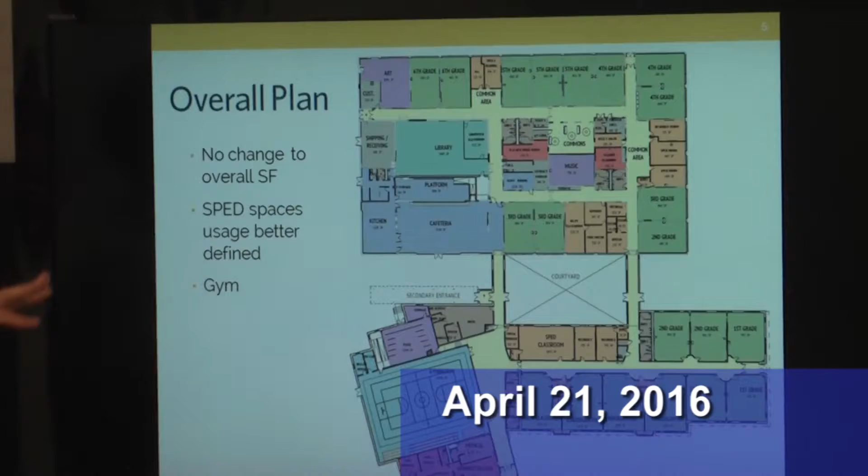On April 6th, we met with the design issues subcommittee that we appointed at the last meeting. That was very helpful. And just earlier today, we met with town department heads. So the overall plan, which you have colored copies of in front of you, the overall square footage has not changed. The major thing that's changed is the special education spaces — we went through those with the district and really started assigning people to each of those spaces.

Before we had just a general idea of, let's have a certain number of small rooms, a certain number of medium-sized rooms, and a certain number of larger rooms for the special education side of the curriculum. Now that we've really figured out — well, this is going to be a speech room, this is going to be a math Title I, this is going to be a reading Title I — we were able to change some of those layouts a little bit.

The gym changed quite a bit. We are sizing it better for a middle school size court, taking advantage of the sides of the gym for bleacher seating — both smaller bleacher seating for when it's used as a gym, and much larger bleacher seating when it's used as a performance space.

We've got ramp access from the gymnasium to the stage, so we have handicap access between those two spaces now, which is critical. We've also got a way to seal off the stage as best we can, so it can be used as an instrumental performance classroom. There's a door between the gymnasium and the ramp, and a folding door at the front of the stage. We also got the ramp between the cafeteria and the platform figured out a little better.

We're still juggling the server room and emergency electrical rooms and those kinds of things that our consultants need to place. We had the server room here in the renovation, but it turns out in terms of phasing it would be much better if that was in the new addition. So we're still playing with some of those spaces.

So we would put glass in the door and probably some glass along that wall so you can see into that space, with storage incorporated into it. We've been able to incorporate two of those in the new addition, which turned out to be really critical once we started figuring out all the rest of the special education spaces, because these became some of our only floating open spaces that anybody could use as a small group room. It worked out well in that new addition space.

So those two rooms are going to be used by other grades besides kindergarten and pre-K? Yeah, I'd say probably the majority of the time they will be used by kindergarten or pre-K, but there's flexibility that they can also be used by the 1st or 2nd grade classrooms that are in that same wing.

And potentially they could open both doors and both classrooms could start sharing some resources between them as well. So it provides that kind of flexibility.

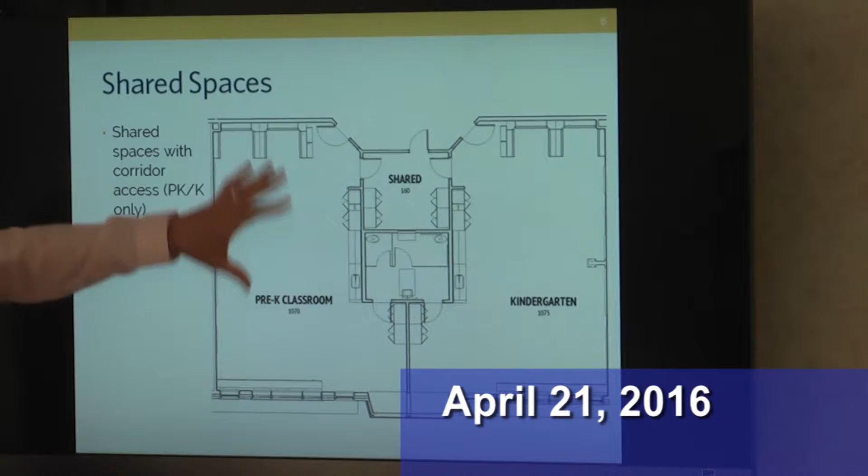We talked a lot about storage with the teachers, so you'll see we have some of these larger, tall wardrobe cabinets. We have more of those than we did before, for storage of larger materials, especially at the pre-K and kindergarten levels. We also talked a lot about the cubby area and how that's arranged and how it divides the classroom, whether it should be on this wall or that wall, and just the storage of the classroom in general.

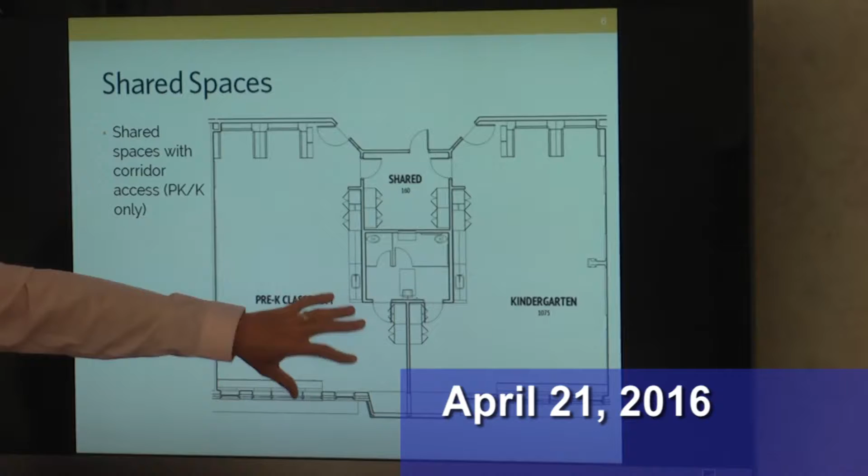Right now, the general idea is that this is the main teaching wall, so there'll be an interactive projector, and then we have some other spaces where you can have smaller breakout groups, moon-shaped tables as opposed to kidney bean-shaped tables.

Can you go back to that a minute? Of course. This lavatory you have down there, you have a door coming in from each classroom. You don't think that's a problem with privacy and use and function with little kids, opening the door with the wrong kid in the wrong spot?

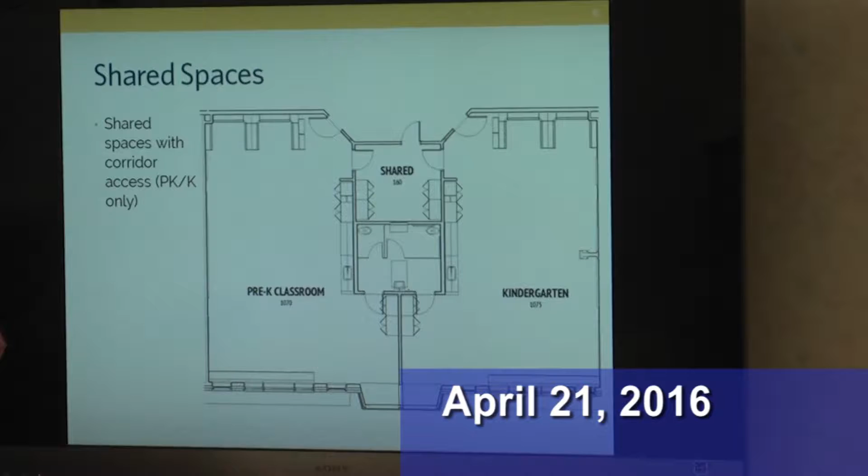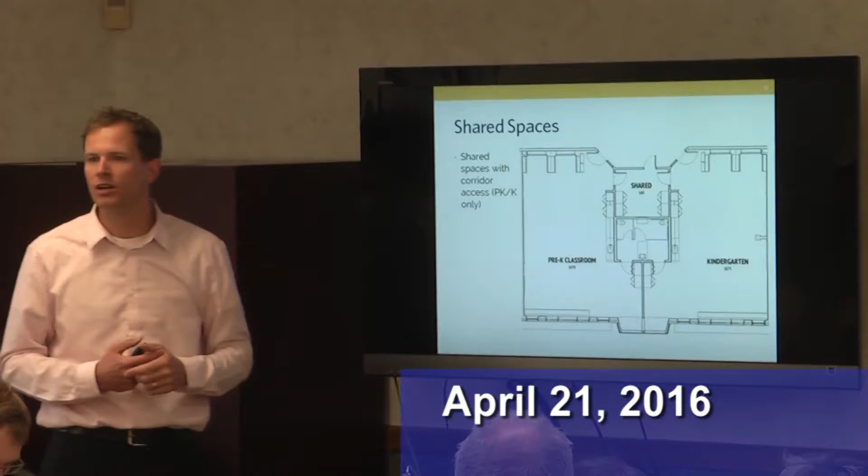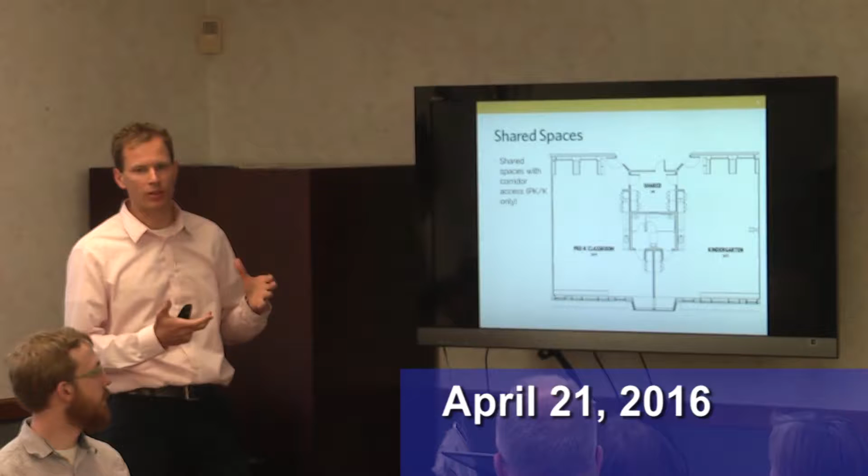So we have 2 different approaches, and that came directly from the teachers. Before, we had each classroom getting its own individual bathroom, and between the 2 kindergartens, that's what we're still showing - an individual handicapped accessible toilet for that individual classroom. At the pre-K level, they wanted the flexibility of having more toilets and just one sink, so they weren't worried about a student going in there and monopolizing that bathroom space by closing the door. Having 2 toilets in the room and one shared sink would be easier to cycle the kids through and to monitor them.

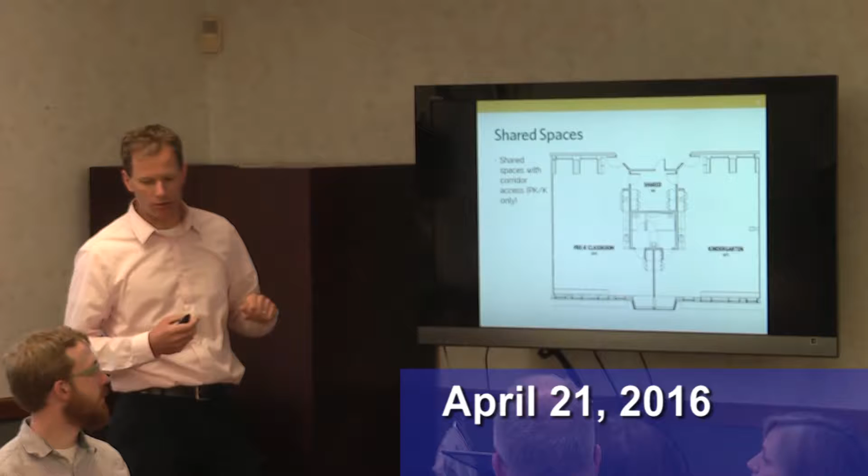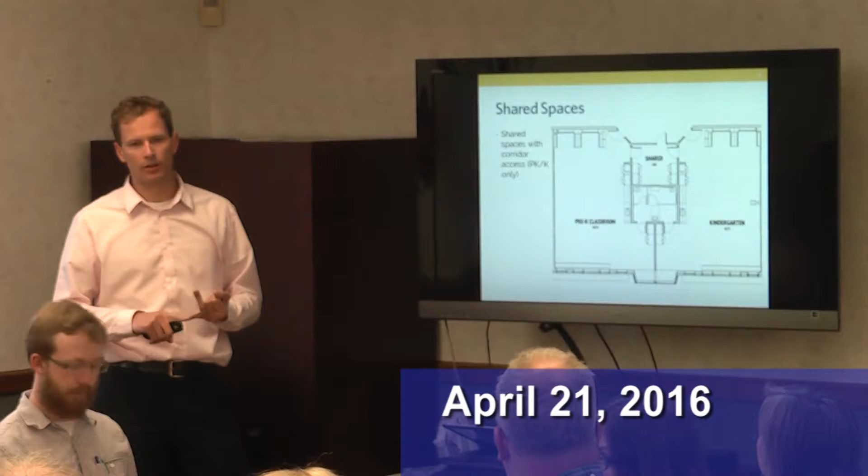So the thought was that this whole school is designed to be as flexible as possible. Right now this year, there's only 2 kindergarten classes. So given this floor plan, if we only had 2 kindergarten classes, they would take the 2 larger rooms towards the east end of that addition.

And the 2 pre-K classrooms would take the 2 rooms on the west end, so they would actually share this bathroom - this would be pre-K, and this would be pre-K. And then that room across the hall, that's a sped classroom, could be used as special education, or we have more flexibility there.

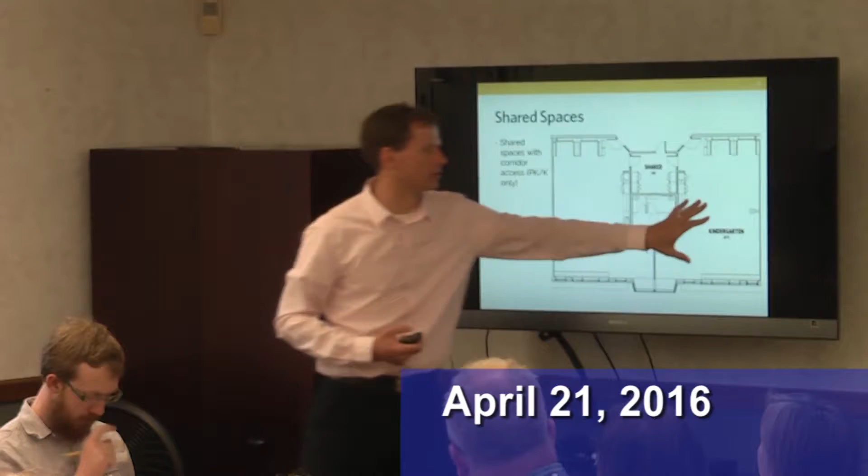If we have 3 kindergarten classrooms, then we're showing it more as we have it on the plans, with kindergarten, pre-K here, and then maybe another pre-K goes up in that sped classroom north of the hall. These are kind of generic names, but it was felt that having those 2 bathrooms and the amount of supervision that happens at the pre-K level, with the number of paras in the room, that kind of flexible arrangement worked better for them.

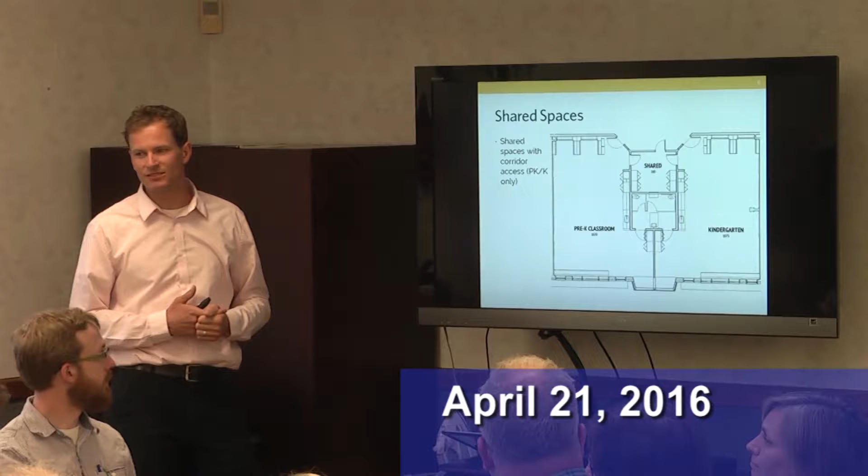You haven't convinced me, but I'm not a teacher - you have not convinced me. Yeah, I've had experience with that being very poor. But go ahead. Yeah, we've done both, and I don't know.

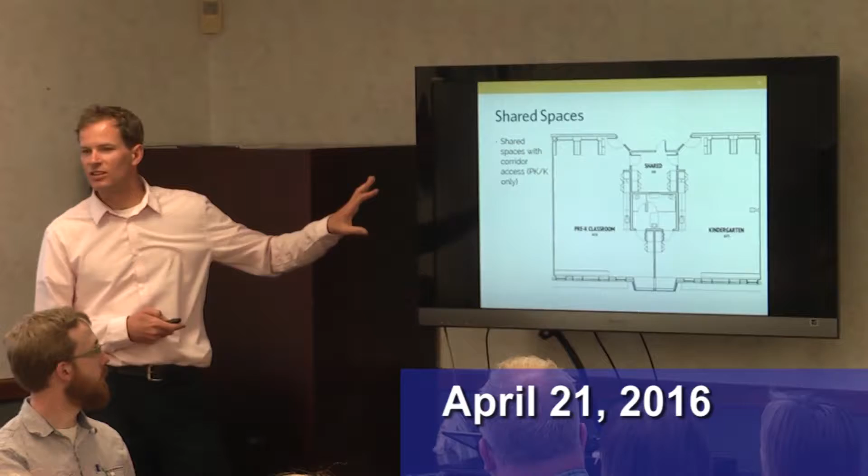Okay, any other questions on the pre-K kindergarten? Actually, I have other questions, but you want us to wait until you're done? No, that's fine. Thanks, anytime.

One question I received from some folks was related to the stage - is there space in the back for the actors or other stage folks to walk back and forth to each side of the stage?

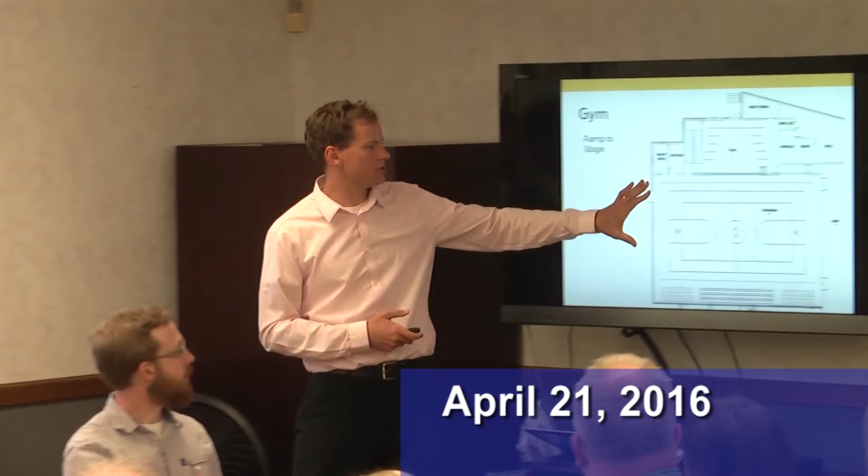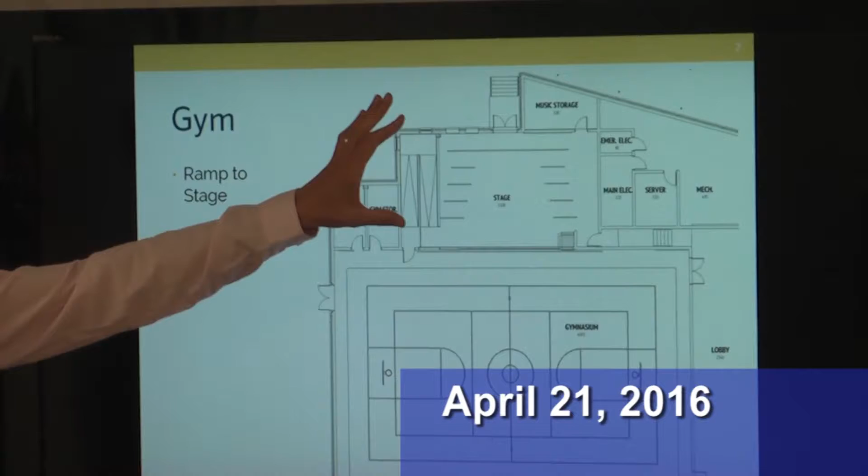Right, so here's the new updated gymnasium and stage. The 2 things the school district requested were: well, code-wise, we need an accessible means from the gym to the stage, which we did not have before. So we've changed that by adding this ramp over here - before we had the ramp coming across here, and this was much larger.

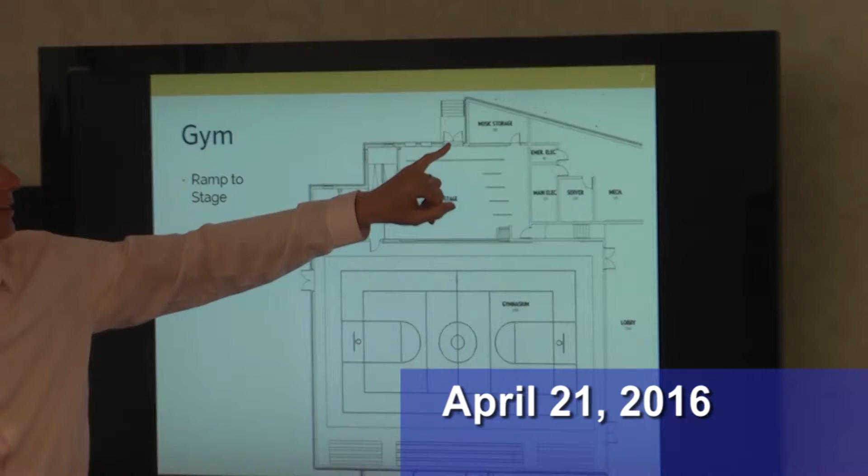But the school also wanted to still have that back of stage access. So we do have true back of stage access from the exterior in terms of bringing in large sets or materials. This stairwell can also be used as back of stage, and then behind these curtains, there is access behind the stage, the performance part of the stage.

That will not interfere with any performance as it happens? Right, because this is primarily asked because in most performances, somebody exits this way and then they have to come back the other way. Currently, for instance, at East Meadow, they go out and take another door to come in, and it happened that the last time, it was snowing outside. So we don't want a brand new school to have people go outside. We haven't infringed on that with the walls, but with the curtain arrangement, that flexibility would certainly be possible.

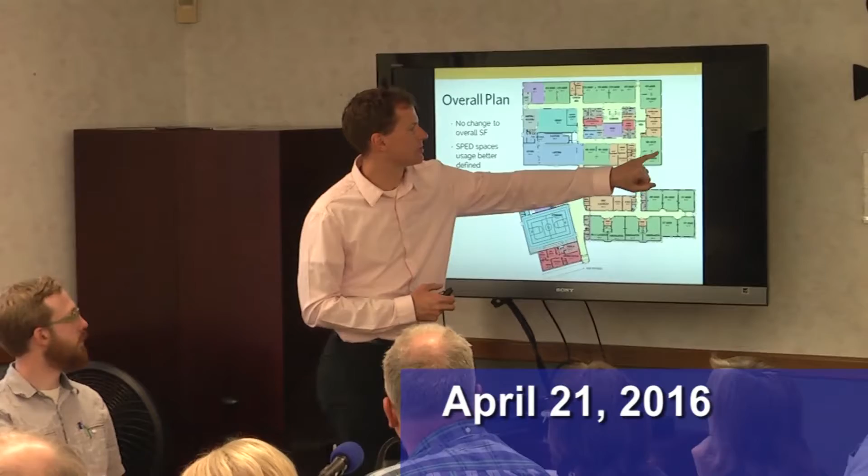Now how does that compare to the available music space right now in total for elementary schools? Well, at East Meadow, this classroom is music, or this one? One of those two down there, so it's about 850. So it is about 850, in that ballpark. So it's about 50 to 60 square feet smaller than it is now. That's East Meadow.

How about West Street? I don't know off the top of my head, because we had a large room there. In West Street, rooms will be smaller than East Meadow's, but they still had their own room. What I'm trying to understand is whether or not this space is adequate for West Street plus East Meadow. Separately, it doesn't make that much difference if we compare those to a single room.

Have you talked to the music staff? We have, and they were worried about the room being smaller. In terms of programming it, he was worried about the room being smaller, but once we started putting in storage and furniture, it seems like it will work quite well. He's got a wall of storage on one side, and the teaching wall on the other. It's got taller ceilings than he has now, which is great.

I don't think for music it needs to be a combination of the size of East Meadow and West Street, it doesn't have to be, because it's still the same - it's just that he's going to be in that one classroom all day instead of moving between the two schools. So the class sizes will remain the same. It'll be more utilized throughout the day, but he'll just own that one room instead of owning two rooms at two separate schools. So I think it was a concern, but not a major one.

And you spoke with both? We did, and we spoke with the instrumental music teacher, and he's concerned about this space too, in terms of noise between the gymnasium and the stage. But right now he doesn't have any room, and unfortunately it's a room that's not included in the MSBA space summary - the MSBA doesn't pay for an instrumental music room at the elementary school level. So we're doing the best we can by making the stage also the instrumental music room.

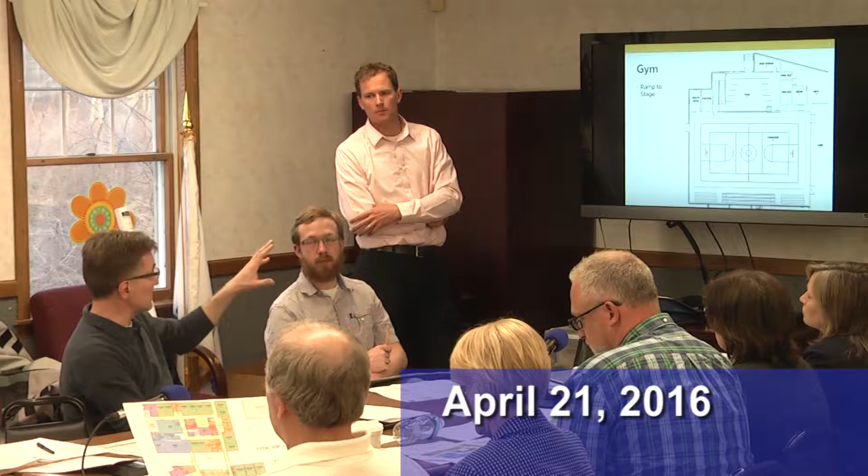Just a quick note. We are thinking about that stage in terms of what we have today and the elementary school we're building, but also remembering this will be used for larger purposes that may involve larger instruments. Do you think music storage is still adequate for that purpose, or did you get feedback on that?

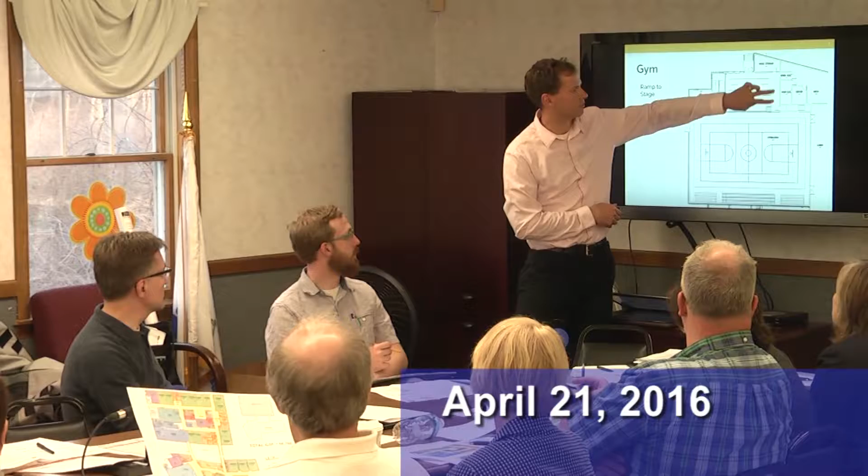He wanted as much storage as he could get, which is what most teachers wanted. The plan we showed him didn't even have this. I think if Greg saw it, he'd be pretty happy. His issue has always been being able to secure the instruments when other things are going on in his shared space. I think he'd be pleased to see a secured, sizable storage room - a combination of a storage room that can fit, plus whatever built-in storage we can have along that wall for instrument storage.

Speaking of storage, does it become an issue? There's always been some storage issue. There are closets off the hallway, up in this area, the whole area, that you're taking away. We're eliminating - we've been telling the teachers about 50% of them. It's probably pretty close to that.

We've been talking about that with Jen in particular because she's familiar with those closets and how they're used today. Honestly, she felt that probably about 50% of the stuff in there could be thrown away without anybody noticing. So I think that's one step.

So for shipping and receiving, is that where copy paper and other things would be stored - is that the plan? Right. Some of that would be distributed to where the copiers are. We're going to have a copier in each of the teacher planning rooms, a copier in the administration wing, and a copier in the library. So some could be distributed to those areas, but right now they don't have a shipping and receiving room. By having that large 800 square foot shipping receiving room, that should help with some of those items.

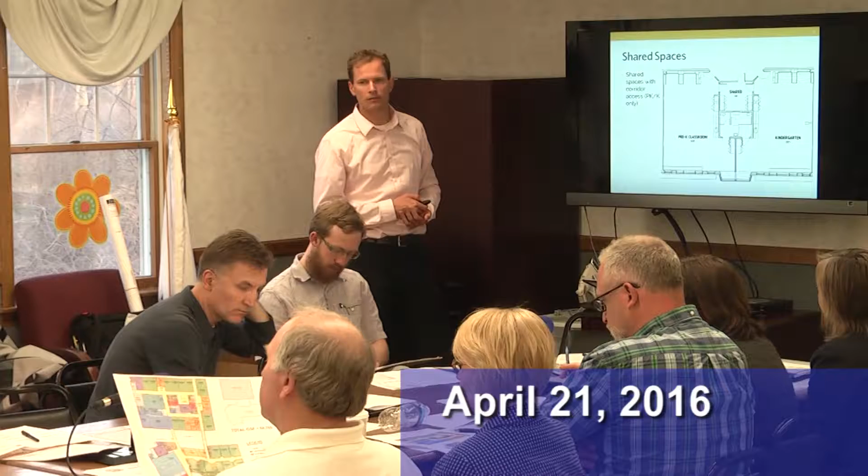Going to the cafeteria.

Christian, do you mind if I ask one more question? Not at all. The computer classroom - is it comparable to what we have today in size? Much smaller. And it will be part of the library, so it's not going to be a divided space. It has glass walls up to 10 feet high, so it's somewhat divided from the rest of the library, but definitely a part of that room.

We've talked to teachers about that. I'd say the majority felt it was no problem, a few felt that was a very big problem. But once we went through it with the principals in particular and talked about the use of iPad or laptop carts, we are going to try to have some dedicated space in each classroom for either 2 desktops or 2 laptops, so they can still use those. It was felt this arrangement would work and speaks better to where the school district wants to go in terms of more portable laptops and fewer desktop computer rooms.

But I think there's a slight challenge in that thinking - we're only thinking based on what we know today, desktops and laptops. If there's something else, like a smart board, that gets added, that room may not be large enough.

We were having the same conversation about technology last night. It's actually one of the key elements of the strategic plan right now, and I'm wondering whether or not a small classroom like that will be consistent with what we're trying to do as far as technology and teaching the kids technology.

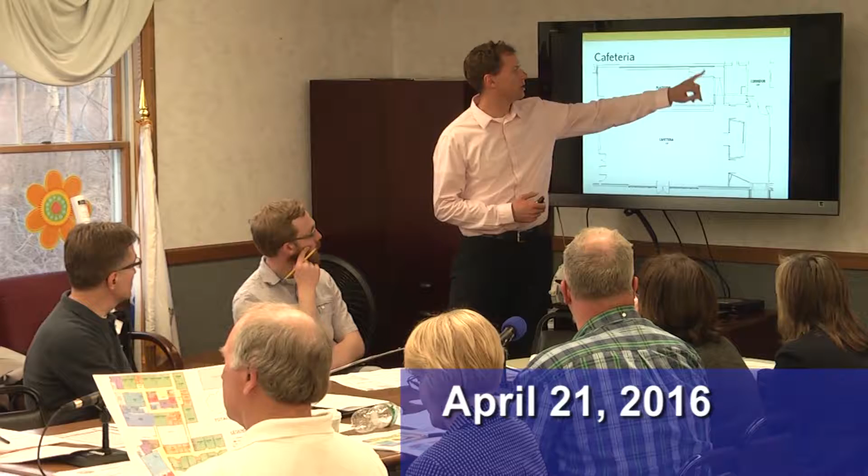Right now, this room is a storage room off of the gym, and this is your access to the platform here. So we're cutting into that room to make room for a ramp. We tried to push it off of the platform as much as possible because our ramp was taking up a great portion of our platform, so we tried to push it into that room with minimal demolition to structural walls.

Right now, this is the instrumental music teacher space, which is divided from the cafeteria by a curtain, and also used for whatever performances they have. So I think this becomes a flexible space that anybody in the school can use. One of the benefits is that if there's a small presentation or even a small performance, that can happen here, and that stage can remain the instrumental music room except for when we're doing really large productions. So there's some flexibility with that.

We also looked at expanding the cafeteria somewhat. Because both schools are coming to this one location, the cafeteria just barely fit the number of tables we needed to seat all the students. Or not all the students, but we had 3 seatings a day, so a third of the student population.

So these are all not structural walls, and this chair storage space isn't very well utilized right now. So we were thinking about expanding the cafeteria out to this edge, making it feel a little more part of that hallway - kind of open to the school, but we wanted to add doors so we could isolate the cafeteria for noise as we wanted. We talked about maybe furring out this wall and increasing the sound transmission class of that wall to protect that classroom from the noise, but it gives more flexibility to the cafeteria and provides a little more space in that area.

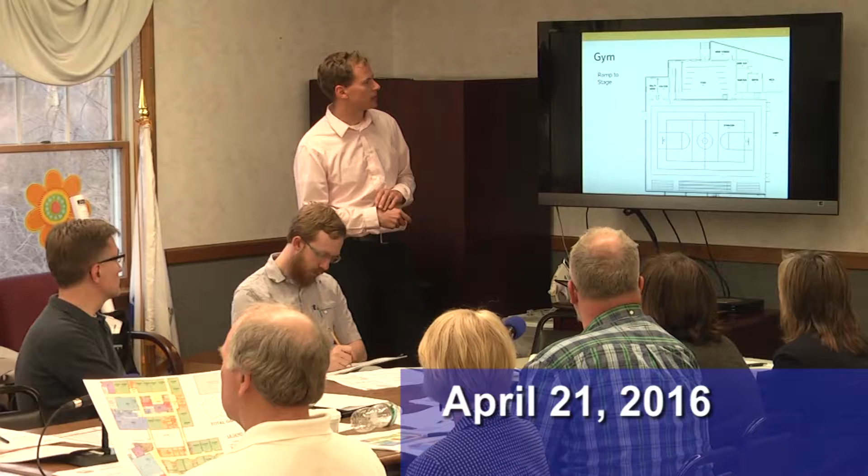The other thing it does is relate to community use after hours. Our current plan is that we can close these doors here, lock them down, and lock down the existing doors here, and use the gymnasium and the lobby as a community space after hours. People can still egress through the gymnasium, through the front, or through that secondary entrance. And if they wanted to, you could open up the gymnasium and the lobby and the cafeteria and shut these double doors up here.

That way you could egress through the cafeteria, through the secondary, through the primary, and then you get some more spaces. So if you had a larger function where you wanted to use both the gym and the cafeteria, you could do that after hours pretty easily.

I don't understand though how the cafeteria would be used during the school day. I see how you added that extra space that was a walkway or a hallway. How is that going to benefit you though if you shut the doors? You're not going to put tables there because you have to keep the space open for walking. So what's the benefit?

The benefit is just from here to there - the closet. So it's just giving you another 5 feet, I see, but for the whole width of that room, that turns into some pretty significant square footage. It gives you a little more flexibility around here. So certainly you wouldn't put tables in there, but it does give you a little more flexibility that way.

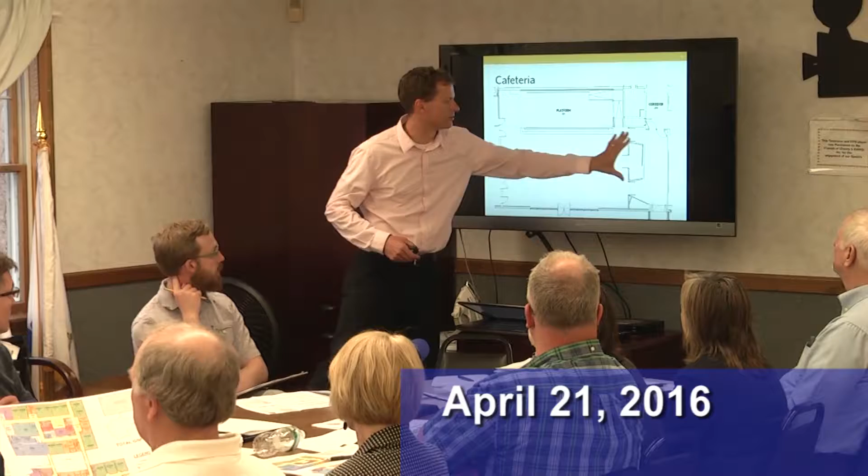And I think it would also just feel a lot more open without having those double doors closing down that wall. If you had that open to the hallway, it might help the feel of that space in general.

Student storage. So that's kind of focused on the floor plan, and then we did dive into some details on student storage.

I think we had the cubbies pretty well figured out for pre-K through 2nd grade. The only change was that we had 2 students sharing one wider cubby, and because of lice concerns and other issues, we want that central divider, so now each student has their own space.

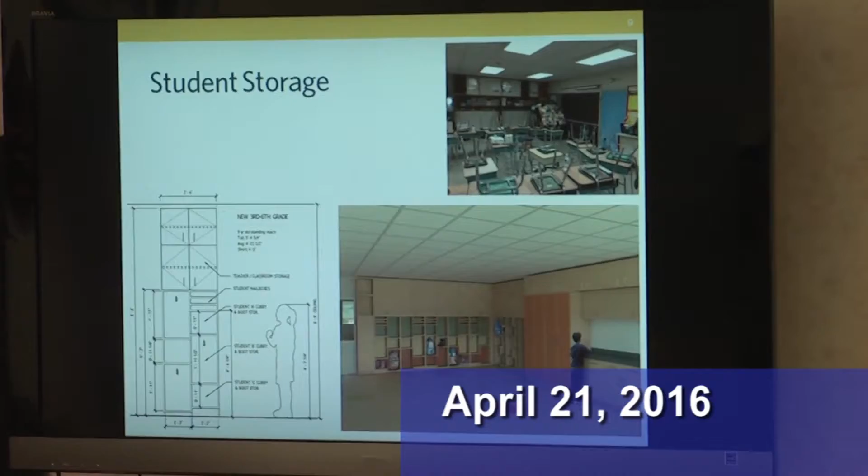Similarly, right now at the upper grades, everyone shares a bunch of hooks in a closet.

And from what I understand, that just kind of becomes a place where you throw your backpack, throw your jacket, throw your boots, and hope that you go home with the same boots that you came in with.

So the teachers did want individual space for the students, if at all possible, at those upper grade levels. It becomes difficult because those classrooms are a little bit smaller, and if we extend the student storage into the classroom, much like we do here at the pre-K level with these peninsulas, we really start cutting out some of that square footage of the classroom.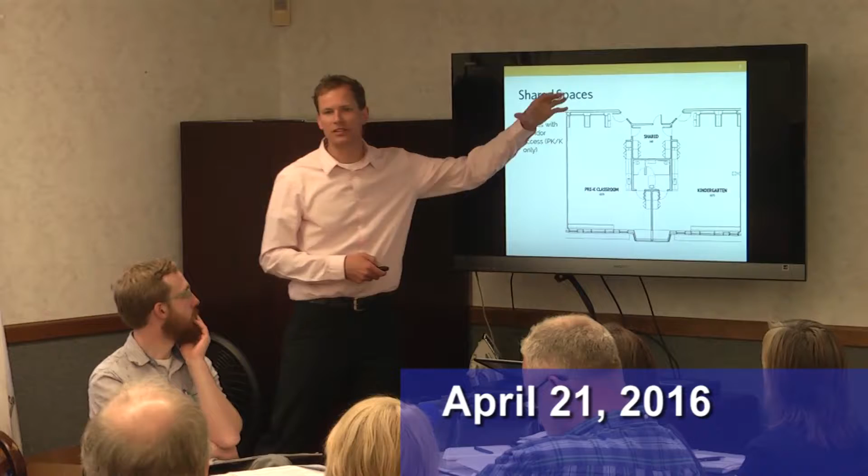So we devised a way to divide the space vertically into 3 different kinds of cubbies, so that you have space for a backpack and boots, and then you still have a small space left over for mailboxes up at the top. We've since heard from Jen that maybe we don't need boot storage for the older grades, but it still seems worthwhile to have a smaller storage area, whether that's for a lunchbox, books, binders, etc.

So right now, student storage takes from here to here, and then the teacher has this little tall wardrobe closet there. By giving each student their own space, we wrap the corner and come across another 4 feet into the classroom, but we don't have any peninsulas jutting out into the room. We're still able to furnish it pretty flexibly, and it does give each student their own individual spot, so hopefully we'll contain all of those things a little bit better than the current arrangement.

We're still getting some feedback from Jen on that in terms of the depth of them. She recommended maybe 14 inches deep instead of 12. So we're playing with some of those items, but this is the direction we're headed for the storage for the upper grades.

Questions on that? Student storage ends up being a very big factor. That's it for architecture. I'm going to pass it over to site.

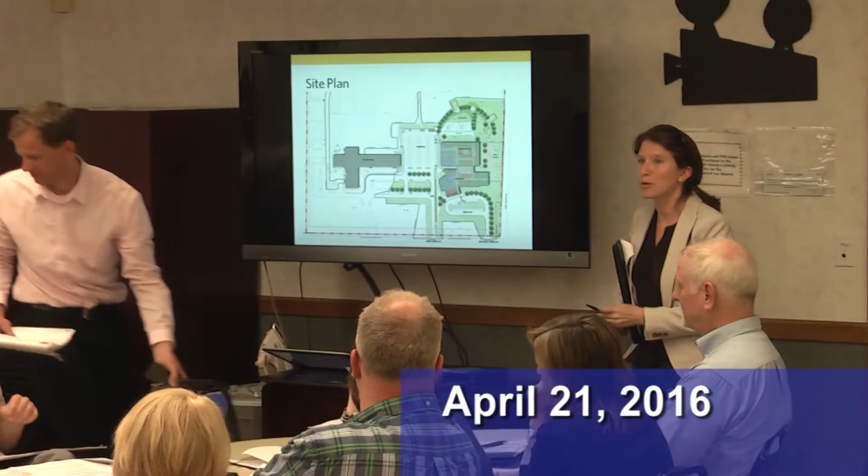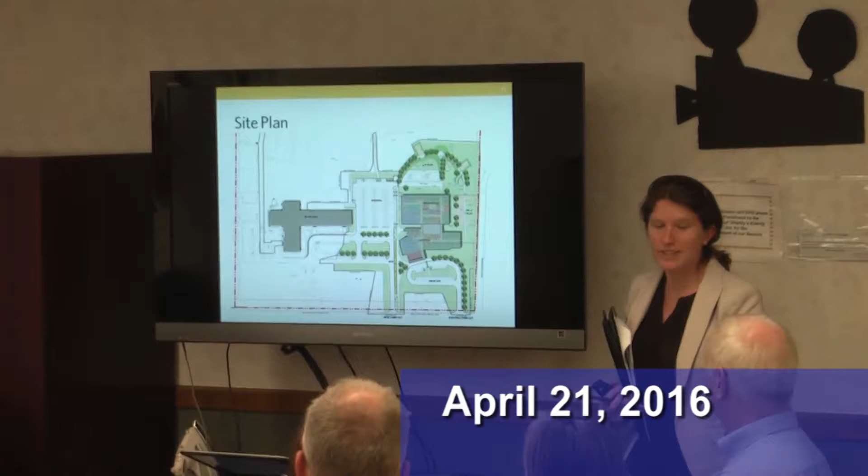So we just wanted to take a moment to update you on where we are and where we left off and where we're headed. I'll be talking about playgrounds, parking, and the courtyard design, and then Mark is going to take us through the well and permitting and all that.

So this is the site plan. This is the site plan where we last left off.

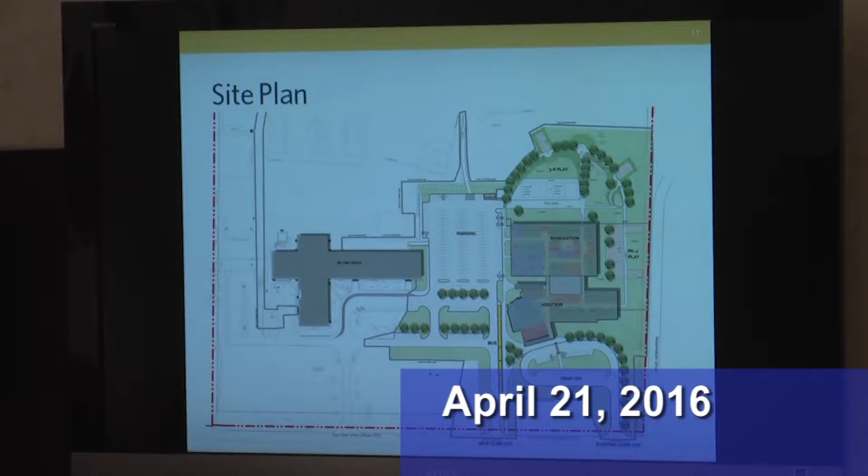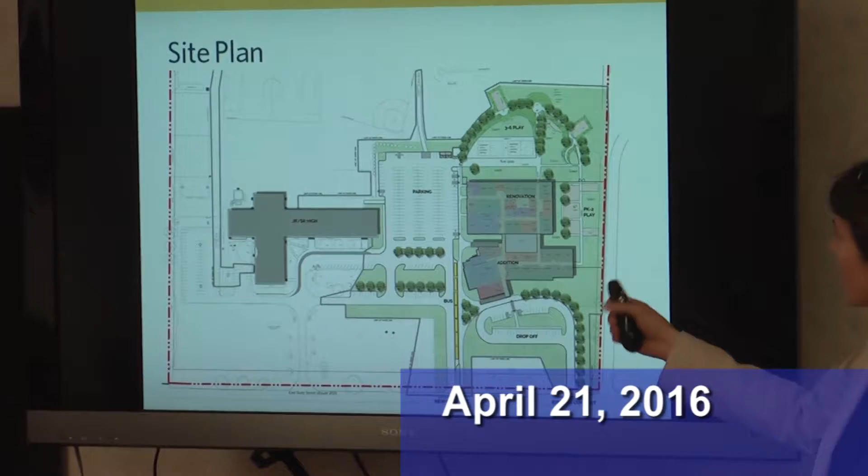Thinking about that a little bit more, first of all, we want to be 100% accessible for everyone. And if we can't be that, then we want to be 90% accessible. So as we're thinking about any changes, what we had in SD was 100% accessible, and what we are working towards will keep that priority.

As of the value engineering budget, we have 460 students for grades pre-K through 6. Of that, our budget was able to purchase us 2 slides. In that budget, we could reuse 1 swing set, and we could afford to buy additional swing sets, and that was it. We did have play surfacing in that budget, which I'll talk about in a moment.

And then the rest of it, for 3 through 6, we were recycling the earth, so to speak, the earth that was excavated from the foundations of the building construction, and using that on site to create terrain and provide structures for slides and swings to sit on. So saving money, using your money well.

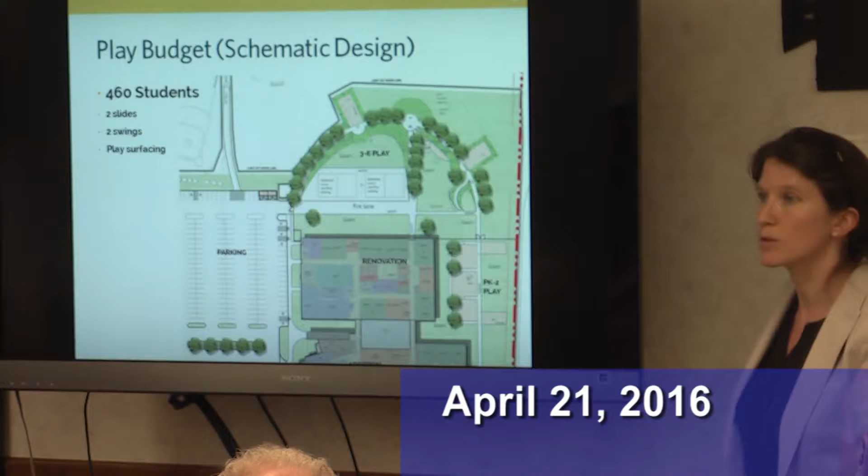So we went back, and again, this is something that will be evaluated holistically as we go through this process, as we save money in other areas, and we work together to prioritize different parts of the design. This number can change, but this is our starting point for going forward. In that value engineering budget, we had a budget of $213,000, and that includes the play surfacing and the $37,000 for the play equipment.

So this number, we're working from the assumption this is our starting point for going forward. And looking at it, the ADA surfacing, the wood mulch surfacing, is pretty expensive. So if we have a strategy where we can reduce that square footage, then suddenly we can buy more play equipment on site.

Looking back at the 3rd through 6th grade area, we were able to retain a lot of our previous strategy. We have a landform that is 6 feet higher than grade here, but the paths to it are fully accessible, so we're less than 5% slope. Anyone in a wheelchair can go up to the top of the overlook and look around. They can access the slide.

We're able to purchase now a climbing net, and we're able to purchase now a wood deck area for gathering, telling stories, narrating, or whatever the kids want to do.

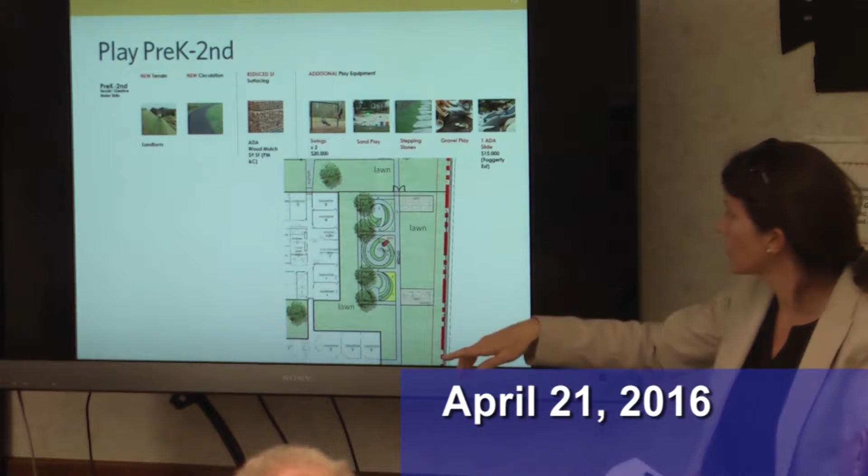The whole circulation is laid out so that kids can run circuits. If they have trikes, they can go up and down and around. So this becomes a maze, a running path, a loop. It can keep going, and then we also have enough to purchase more swings on site.

Let's go back to the third to sixth grade area for a second.

Who determines, or did you determine—I just missed it because I missed a meeting—what equipment you buy? Like, why did you say a climbing net? Okay, we can talk about that.

We can go through what equipment teachers want. What we started with, when the budget was cut, we looked at what we had: 37,000. A set of swings is 10,000. An ADA slide is 17,000 or 15,000 depending on your age group. So we picked those because that's the way we could extend the money the most for those age groups.

Looking at play activities for this age group, they're very active, social, and developing advanced motor skills, so having something on the playground that's challenging for them is often recommended—whether it's a climbing net structure or something else that the teachers would feel is an equal activity. I have no idea.

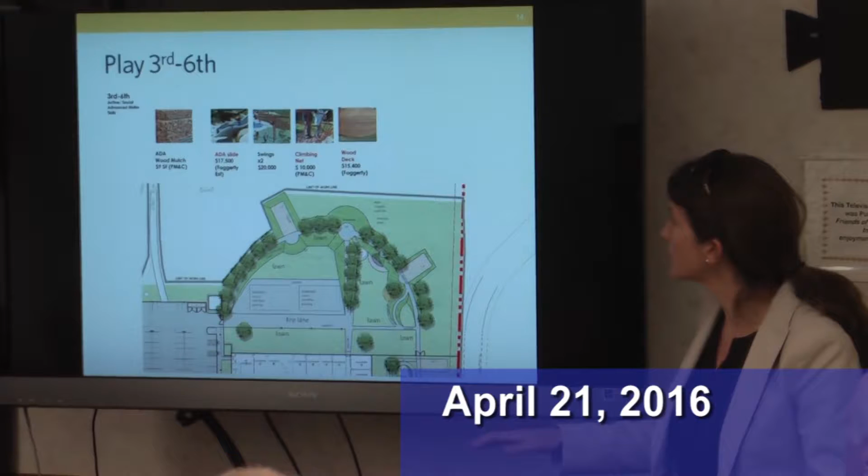What's different about this plan from a traditional play system is that with a traditional system, you invest in a play structure with ramps and connecting pathways above the ground, trying to get people up to the height of the slide or climbing structure. What this is providing is that we're doing that with earth—the earth provides access up, the change in elevation, and then we're hanging different structures off of that.

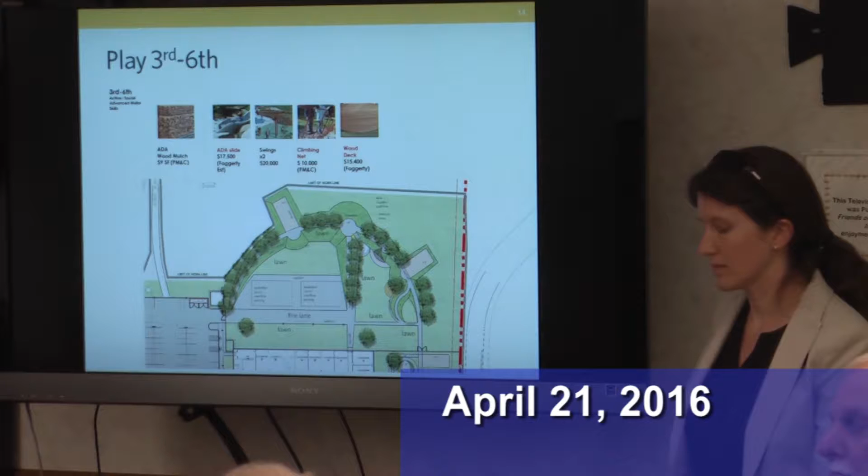Okay. So are there any other questions about the play equipment or strategy?

Just want to bring you up to date with the parking strategy we have on site. So today we have 248 spaces that are shared between the junior senior high school and the East Meadow School. Our working assumption up until this point has been we're adding West Street to the East Meadow population of the school system, so we need to expand.

West Street School. Sorry, that's okay. West Street School—I went there. That was my elementary school.

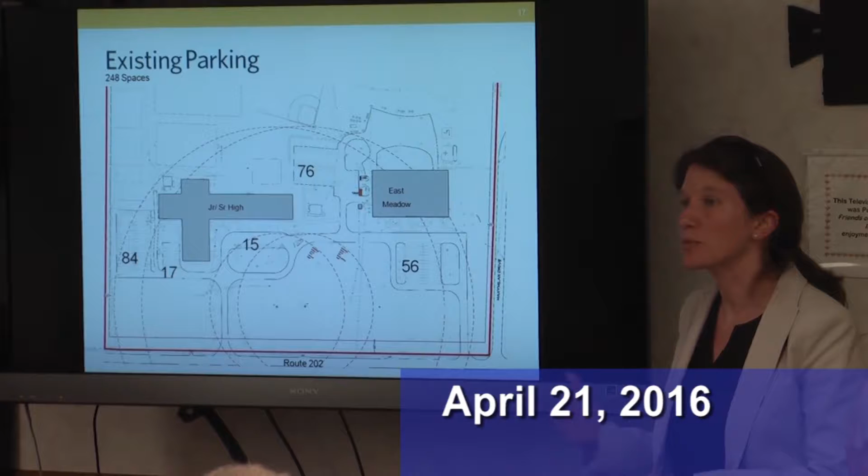We're adding that student population here, so we're under the assumption that we need to increase the parking spaces by the number of parking spaces that are at West Street. That would bring us up roughly to 360 spaces on site.

This is something we're going to want to revisit with you guys again as we go forward in the process, because there are a number of different factors pushing the numbers down or up based upon the criteria. One criteria is that we looked at the Department of Transportation's recommendations for parking spaces based upon the student population, and the 360 is a little bit higher, so that's something we may want to reevaluate. According to those recommendations, this is a surplus of parking.

LEED 4.0 is going to be part of a larger discussion and should be looked at with all the credits so we understand what we're turning down and accepting. Their requirements for parking turned it up a notch. What they require is their base minimum to get a credit, so they require taking the Department of Transportation numbers and then reducing them by a percentage. That number could go down even more if we wanted that credit, or we could choose to not go after that credit. Part of that credit also, this is a new thing, is that it requires one of three things: an alternative fueling station with alternative fuels, an electric charging station, or a bus fleet that is completely green with certain emissions requirements.

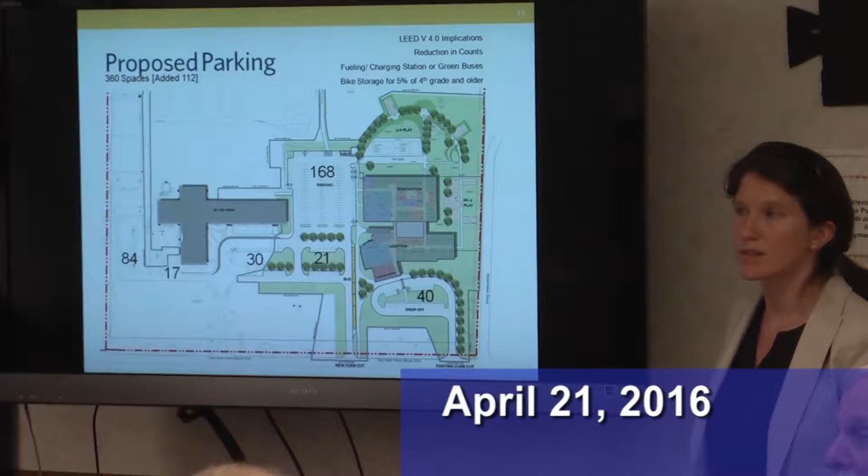You're showing this parking lot, the one that says 168, it's probably 20, 25 feet from the edge of the school up there. We need that parking lot the day school opens. You're going to start construction in June or September of '17, and we're going to be using that back building in September to put students in. We need to have that parking lot built and ready to be occupied when students come in. How are we going to get there?

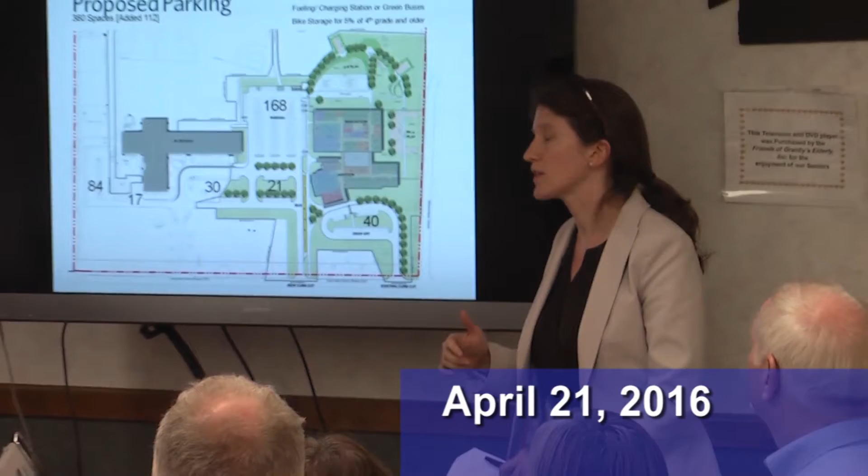We had a very helpful conversation before this meeting with the department heads, and we were talking about exactly that—how we're going to phase in bus access and parking.

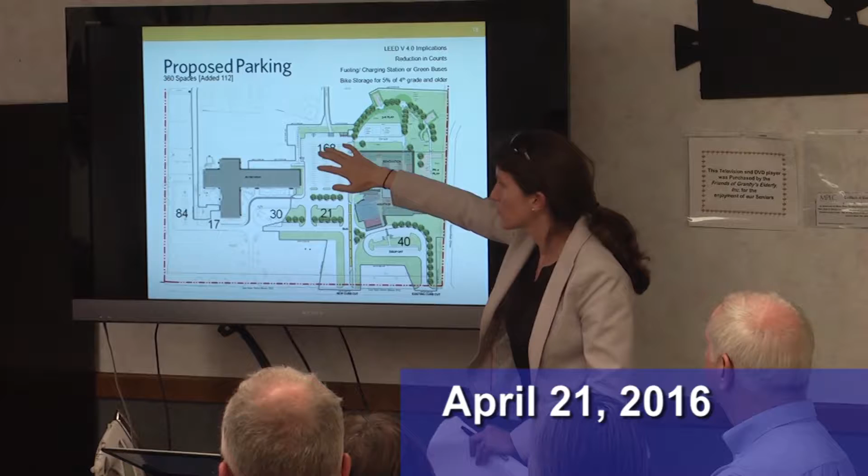So in phase one, where my hand is, will be the construction staging area. This will be fenced off as the construction part of the site. We had talked about possibly connecting to Maximilian Drive or bringing buses through the site and exiting on Maximilian, then having the existing parking lot for parent-teacher areas. But that's something we're going to have to work out more to make sure it works at all phases of construction.

This is a personal opinion, but if you're doing it in the first phase, we don't want the second coat put on it and have the contractor driving their trucks around on it all day.

Oh yeah. I'm still very concerned how you're going to do this when you're only 25 feet from the building, and we've got to get every one of these students in and out of that building every day.

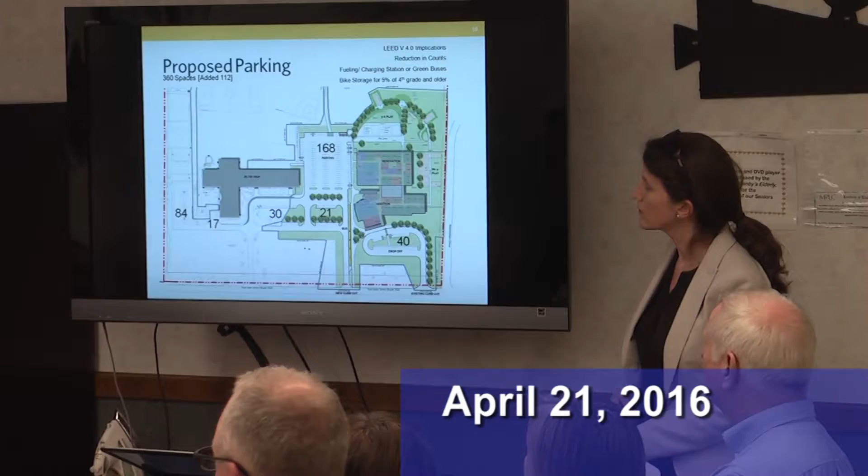Well, some of this site work, Jim, is scheduled to happen during the summer. So from the day school starts, when school opens, you'll have parking lot 168 or some semblance of that ready for us to use. When the school opens to both student populations in the fall of 2018, they've got to park somewhere if you're taking the whole front, and you're taking part of the high school, so we've got to park somewhere.

Right, put it in your thinking cap. We'll come back with the phasing plan after we've revised that. I think that'll help—something that keeps me awake at night. Okay. Rachel too. We'll put that at the top of the list. We should have gone to our meeting.

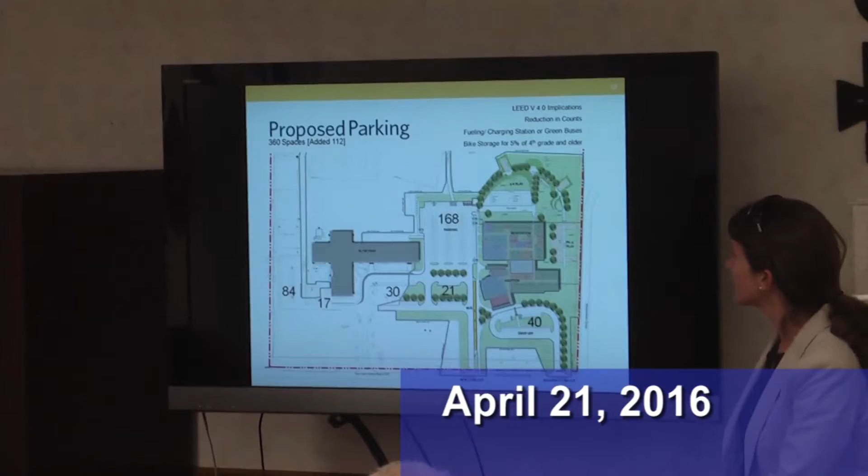Okay, so now I want to update you on, and get your input on, the courtyard area. Between the existing school's renovation and the new addition, there is an open area, open to the sky, that's now a courtyard. So the question is, what are we going to do with it?

With design, we're constantly being pressured by cost and function—what are the functional needs of a certain space? This is where we're helping you out, figuring out how to navigate those two aspects, and also how to make it a wonderful experience and space. So, starting with the functional aspects of the courtyard.

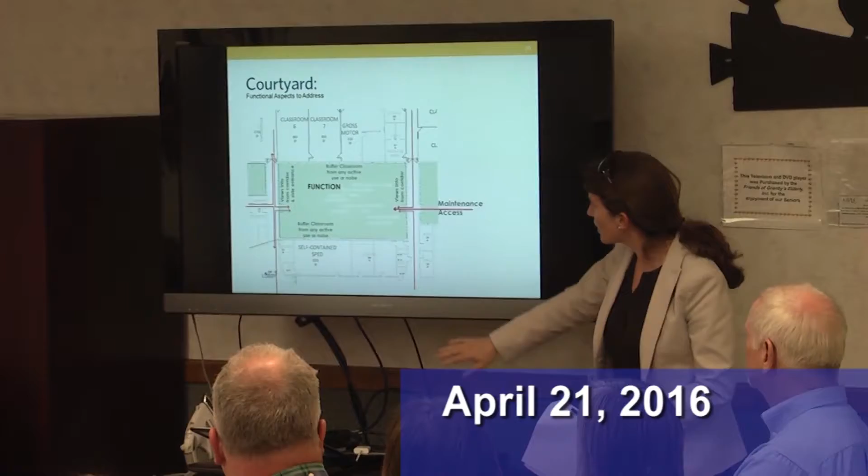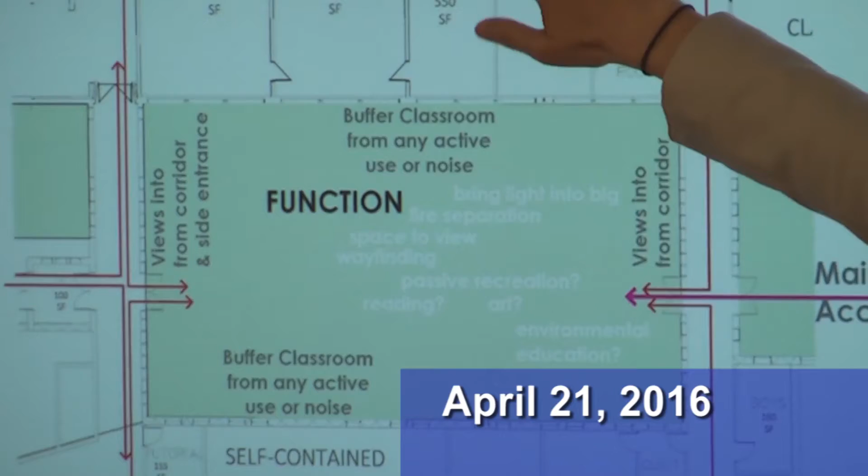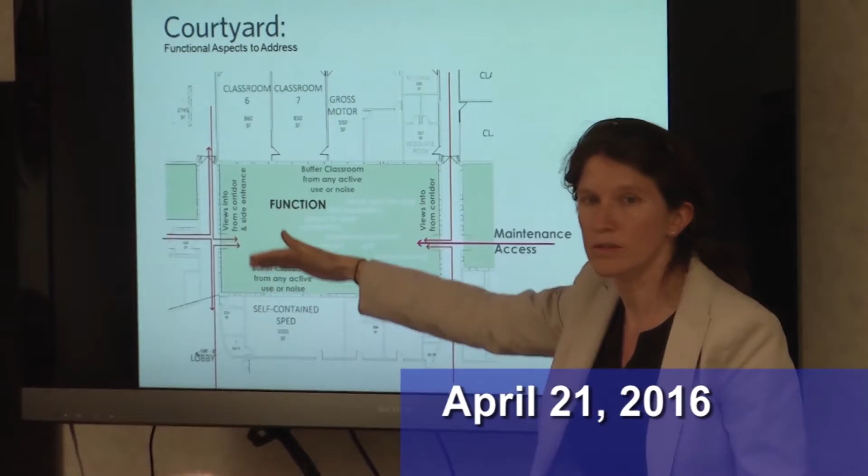What's happening around the courtyard often tells you what needs to happen inside. We have classrooms, gross motor skills, a resource room, all with windows out into the courtyard from the existing East Meadow School, renovated. On the south side, we also have windows out into the courtyard, so that tells us we need to buffer noise or distraction so kids in the classroom aren't always wondering what's going on out there.

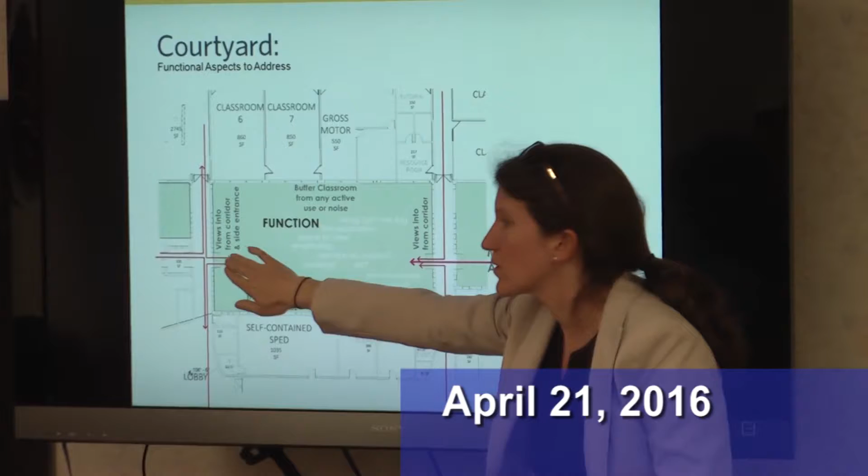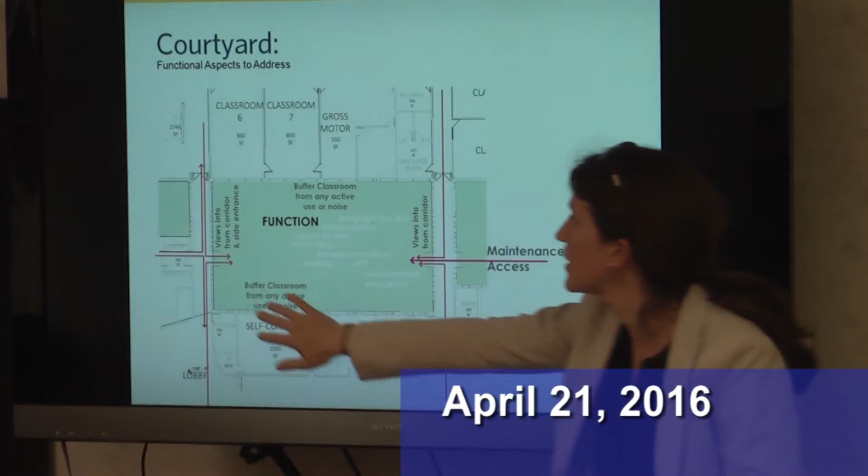Additionally, we have the east and west side corridors with views into the courtyard. From the secondary entrance, there are views into the courtyard, so it becomes a pretty iconic moment in the arrival experience and your conception of the school. So views in from this end could be pretty important.

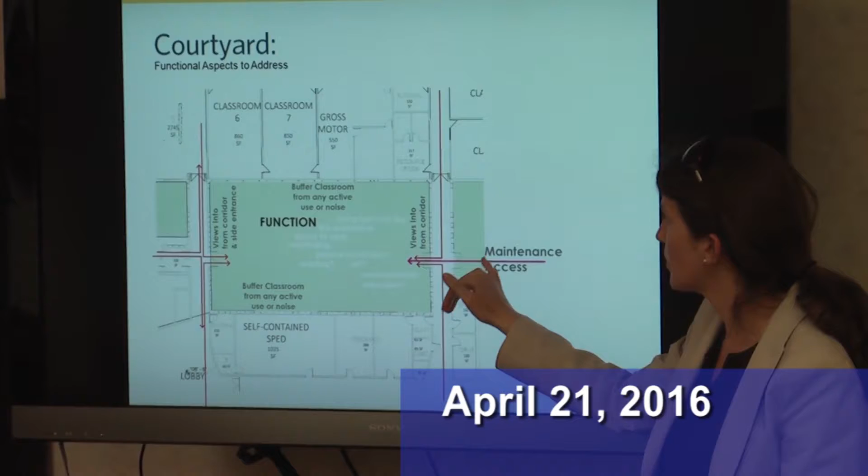We can change this too, but we've heard there might be a desire for a mower or service access to come through, if maintenance work is happening outside and there are maintenance requirements for inside, through the corridor on that side.

The reason we have a courtyard in the first place is that we're required to have a fire separation between the two buildings. Is that right, Christian? Yeah, it's more for daylight and views.

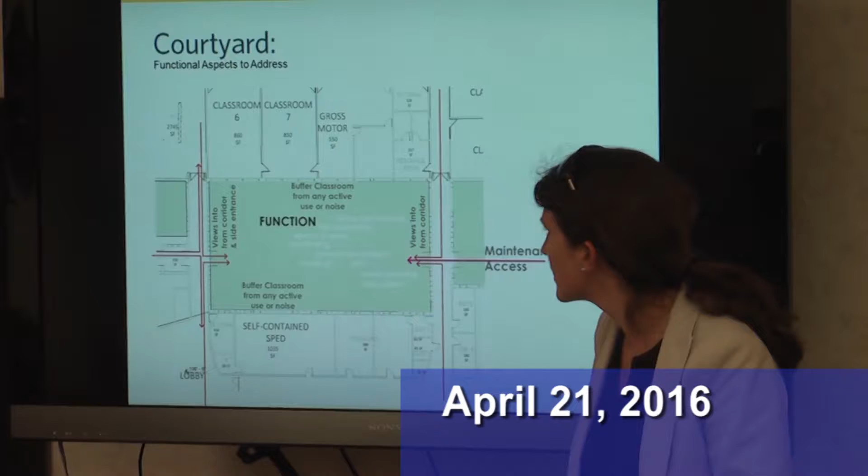We've heard there's an existing courtyard at the other school that's used for reading. Is that right? Yeah. So we've heard an idea that maybe a similar thing could happen here. But if there are any other uses you want to have happen here, we'd love to hear it.

Starting with costs, one thing I like to do is get a handle on the square footage to cost trade-off. I'll take the square footage of an area and say, if I just planted grass here, how much would that cost? For this option, if we just left it with no separation, that's about $15,000. It also means someone has to come in and mow it every once in a while, depending on the type of grass we plant. So from a maintenance standpoint, it's not just being left alone, there's actually a maintenance cost.

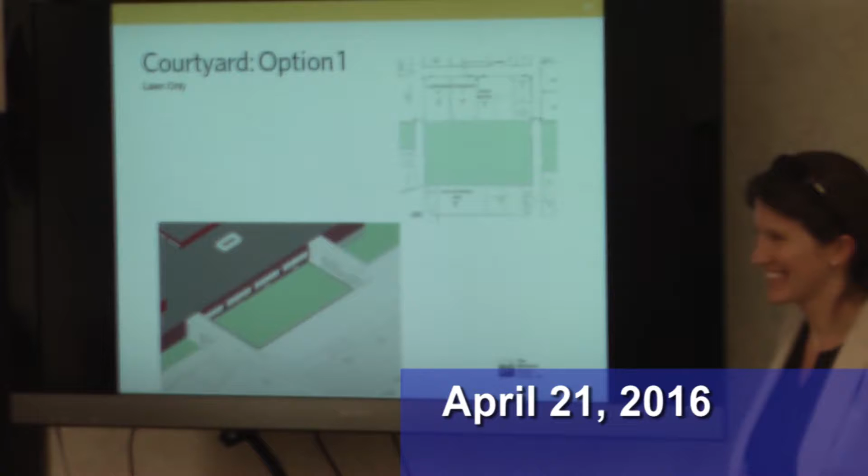But John's shaking his head because that means leaf raking or blowing and picking up, and a lot of leaves on the roof. It's a flat roof, and it clogs the drains, the leaves go down and clog the drains. Do we have those problems currently? Oh, yeah. Not the high school though.

Is this gonna be like that? They'll have no place to blow the leaves now, you're gonna have roof all around. The tall one, well the one on the right, that's more of an ornamental type, it doesn't have leaves that blow around and get stuck on stuff. So how do you get all those leaves out of there? Leaf blowers, lawnmowers.

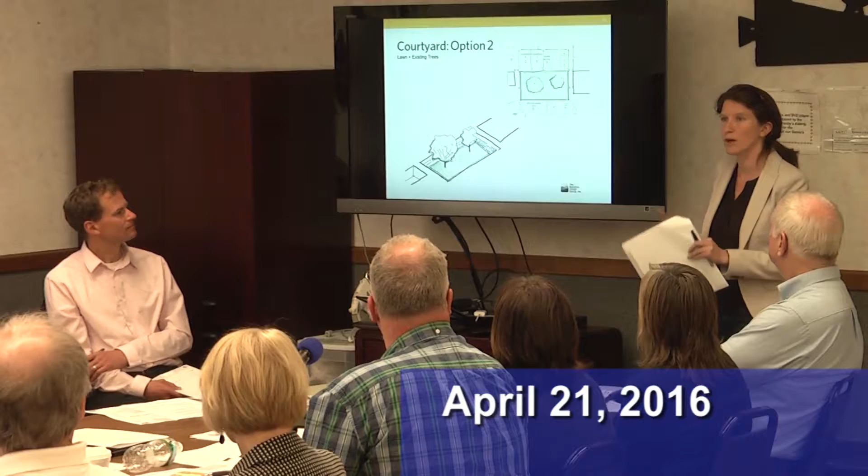So we decided to look at a couple options that incorporate the trees. If the trees are out, they're sort of moot, but we'll go forward. This is just a simple option 2, where we still have a lawn that has to be mowed, and we keep the existing trees. It's simple, there's something to look out at. It maybe doesn't screen views from each other, but that becomes more of a management issue - who actually accesses the area and when, that type of scheduling.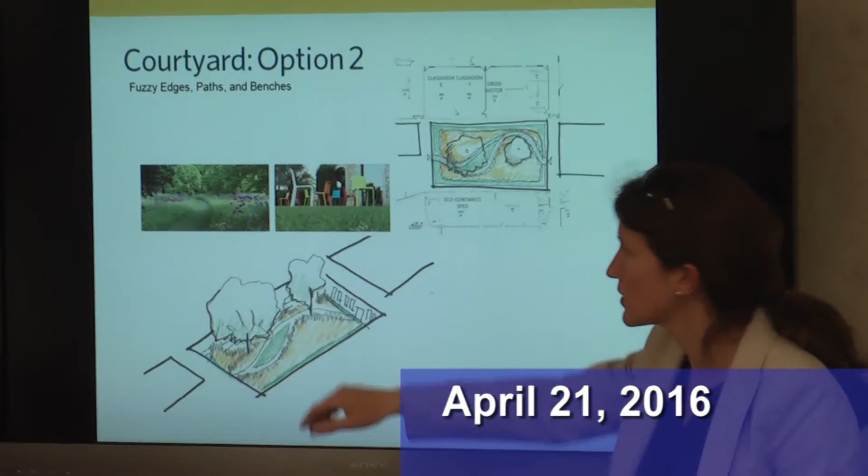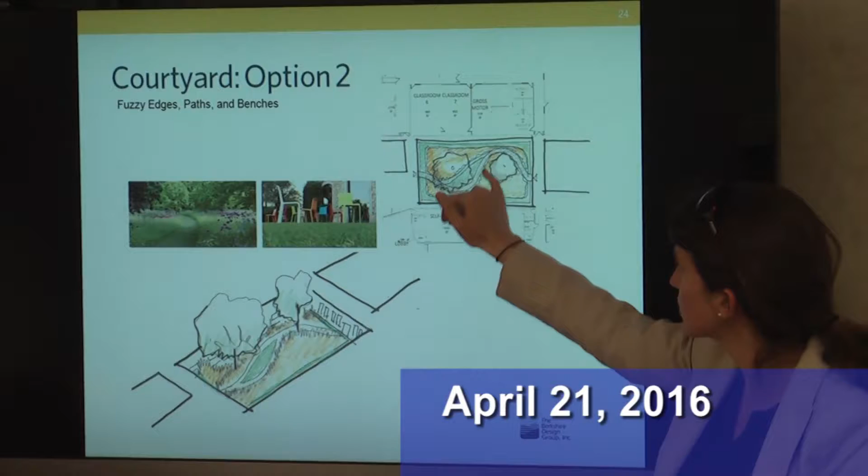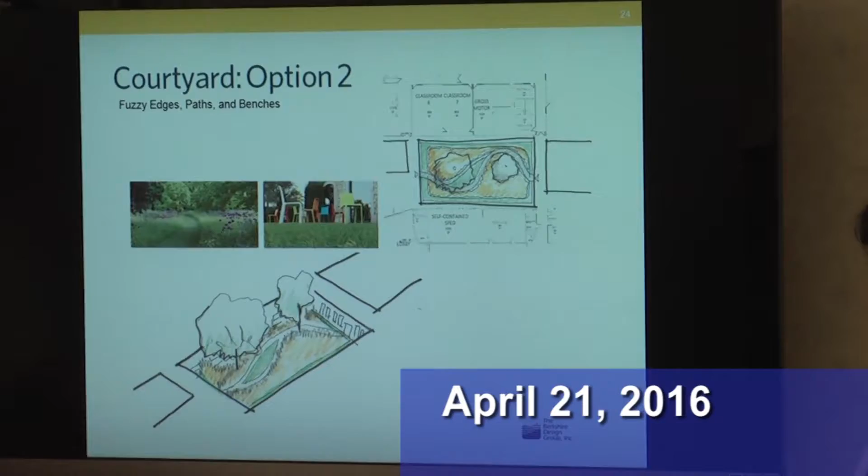Building on that, thinking more about screening and reducing the mowing scope, we can select types of fescues that need to be mown once or twice a year, underplant them with wildflowers or colorful perennials, and provide an accessible path through the center. The height of the grasses creates fuzzy edges and a bit of a visual barrier for students sitting at their desks looking out. We could have a central area left as is, or with colorful chairs put out - it could be a reading area, pretty adaptable to whatever the school needs. So if you do grasses that grow taller, you'd need chairs up there - they don't sit in the fescues, right?

Right, so we're thinking this is the path, and this is another path. This area could be mowed in the center, or it could be gravel or something else, but there would be a central space you could gather in and put chairs or rocks or stumps.

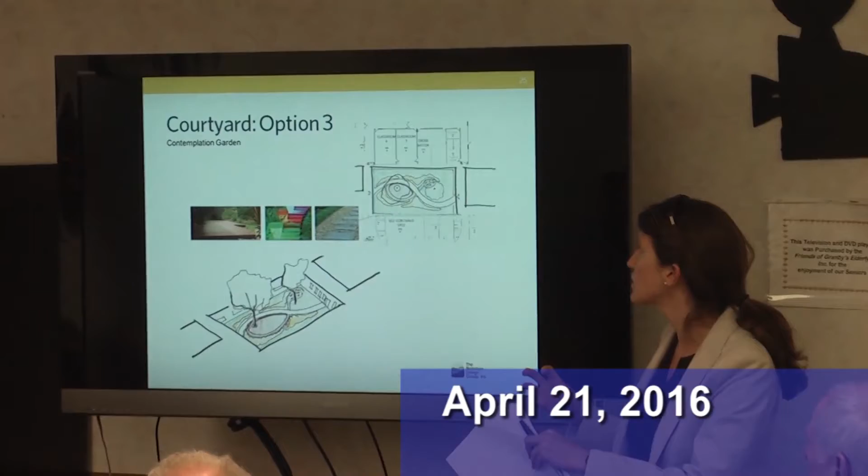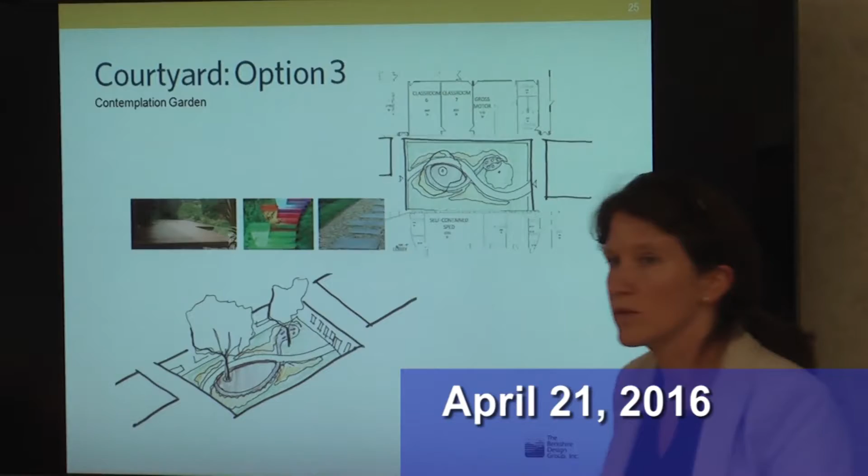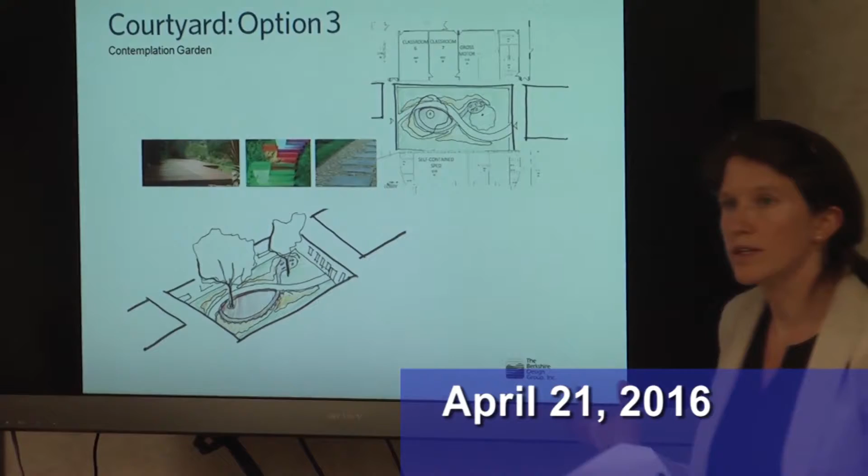Another option would be to carve out maybe two seating areas, two nodes in the courtyard. One would be a raised wood deck with a hole cut out for the bigger tree that you sit around to read or talk quietly. A river stone path with stepping stones leads to another reading area. We could take stumps or other things, even milk crates, and paint them with glow-in-the-dark or brightly colored paint, so this becomes another gathering quiet seating area, and this is a larger quiet seating area.

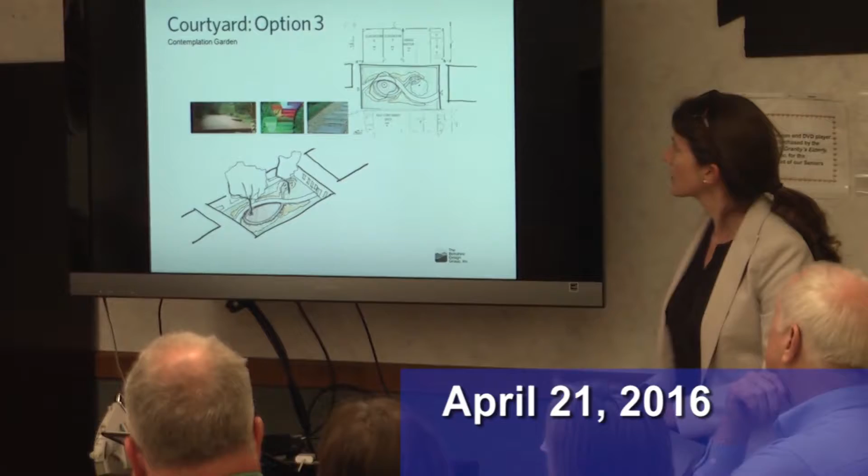So that's that. Rachel, what's the size of that courtyard? 4,800 square feet. What by what, just trying to- 60 by 80, roughly.

Just a quick question - you were asking the purpose for the courtyard. As we discussed earlier, one of the primary purposes was to provide natural light into the structure. If we go with the option where we have the trees, is it really negligible impact, or is it really part of the purpose of having the courtyard to get natural light? From my perspective, it greatly increases the quality of the natural light that comes into those spaces. It does increase it.

What you don't want is glare, right? So you want natural light, you want views, but you don't want glare. Those windows face almost straight due south, a little bit off, 15 degrees. But with those shade trees tempering that daylight coming in, I think that would help a great deal. To the south of the new addition, we're doing an exterior sunshade outside the window, so we're trying to do a similar thing.

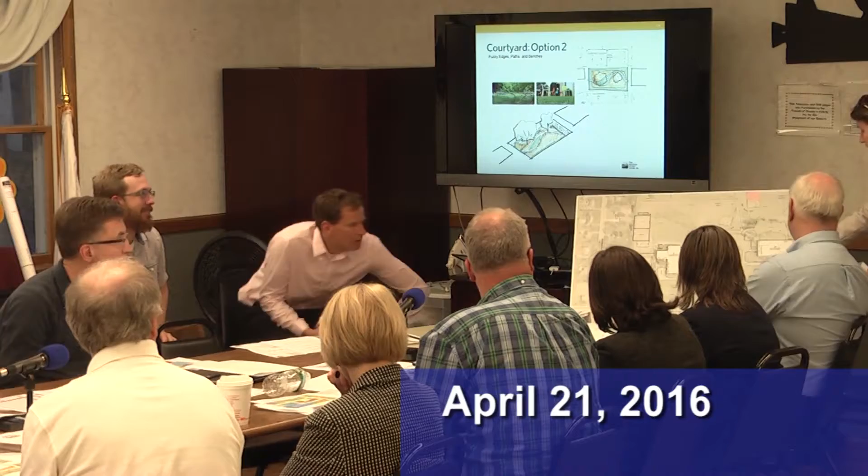It's on the survey, we got it here. Is it overhanging? Might be a little bit, they were trimming it back a little away from the roof. Probably about 10 feet from the building. This one's 9 feet, and the trunk is probably 15 feet away, so it overhangs the roof.

I think it's closer to the existing building than it will be to the future one. So if it's an issue for the roof drains now, we just have to keep trimming it back.

Are there others? In terms of usable space, I actually like your idea of flipping it, creating more usable space, and doing the separation with tall grass in the middle somewhere, so you can create separation but also leave a lot of usable space. And I agree we should try to keep the trees as much as we can.

I do have a concern about the noise stuff, weed whackers, lawnmowers going in and out of this space. That all's gonna have to get mowed once a week. I would, if it's growing. Or can they do it either before or early after, before school starts or after school ends?

But does there have to be mowing grass? Well, before school probably not. School starts at, I assume, 7 o'clock there. No, no, I'd say 8, closer to 8. John, have you had any experience with no-mow grass?

No, have you heard of that? No, I have not. There is a seed mix, it's a little bit more expensive, but it maxes out at about yay tall, and you really only have to mow it once a year. So that's something we could maybe explore.

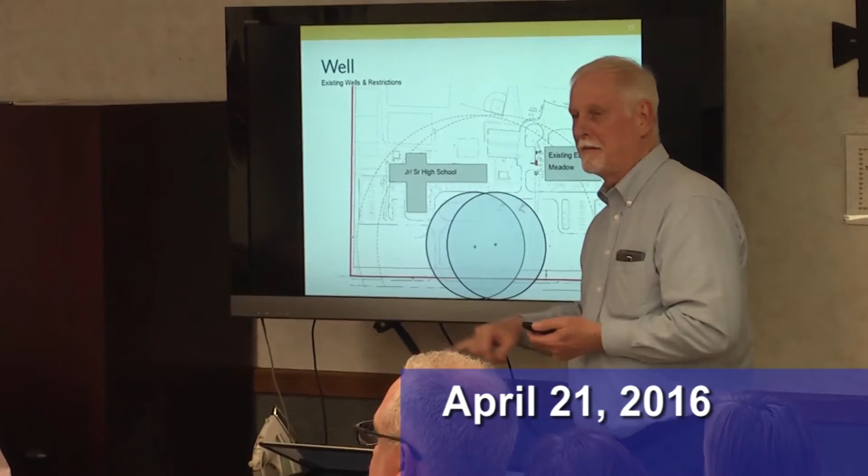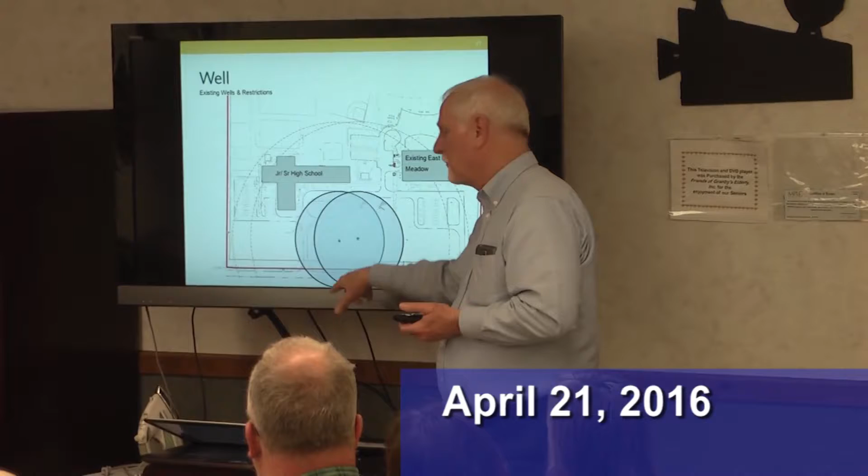Most of you are familiar with the process that we need to eliminate these front wells and create a new public water supply, primarily because of this Zone 1 radius, which from DEP's perspective is supposed to be used strictly for water resource areas. The fact that it's currently in violation with the driveways and the roadway, and that we may want to expand the capacity of the well ever so slightly, means DEP would frown heavily upon any development within this area.

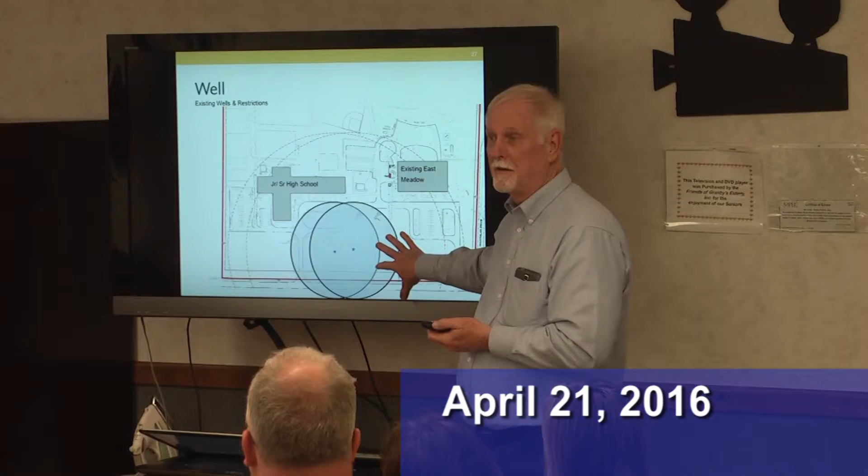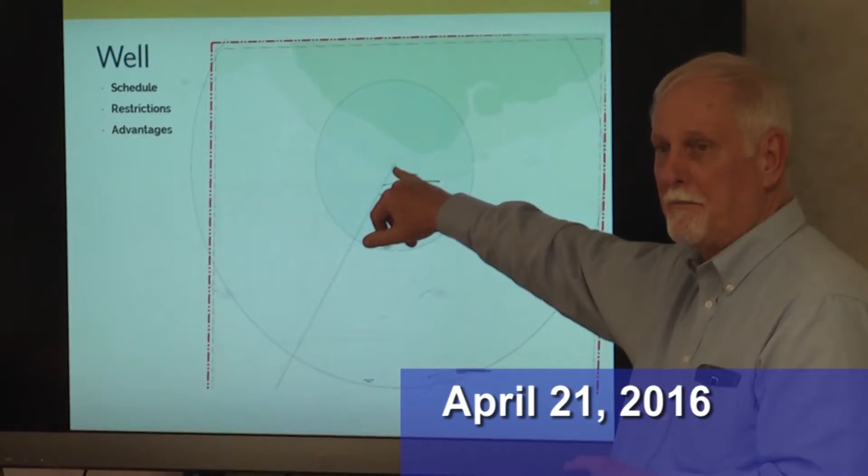So basically this Zone 1 has to go away in order to do the construction you're proposing. We explored the possibility of putting this at the very north end of the project site, putting the well up in this location, way up to the north. Again, this is a preliminary discussion—nothing's decided yet. We're still going through the scenario.

Anytime you have a public water supply, there's two zones associated with it. The Zone 1 primarily is supposed to be used strictly for water-related issues. There's a Zone 2, which is much larger diameter. You're not really restricting what you can do there, but DEP wants to know everything that's going on in that area, so that's something that has to be explored and delineated.

It does create some minor restrictions on uses in that location. The only one which probably would be relevant here is if it went onto a private residential site—there's a limitation on how much sanitary sewage you can dispose of on those sites, so many gallons per day per acre. Basically, if this circle goes onto the abutting properties, it would possibly, not necessarily, limit the ability of those 3-bedroom houses to go to a 4-bedroom house.

So that would be one of the aspects, and that's why at this point in time we've shuffled it around so it has the least impact on any neighbors. We explored the proposed development up to the north taking that consideration into account.

I do want to reiterate, this is a moment in time we're looking at where this site should go, but just to keep you aware, it does have potential to impact some of the recreational fields here because it's supposed to be used strictly for water resource areas. DEP could be flexible about possibly having those for athletic fields if there were appropriate restrictions regarding herbicides and fertilizers, but no guarantees—we'd have to work that out with DEP at that point in time.